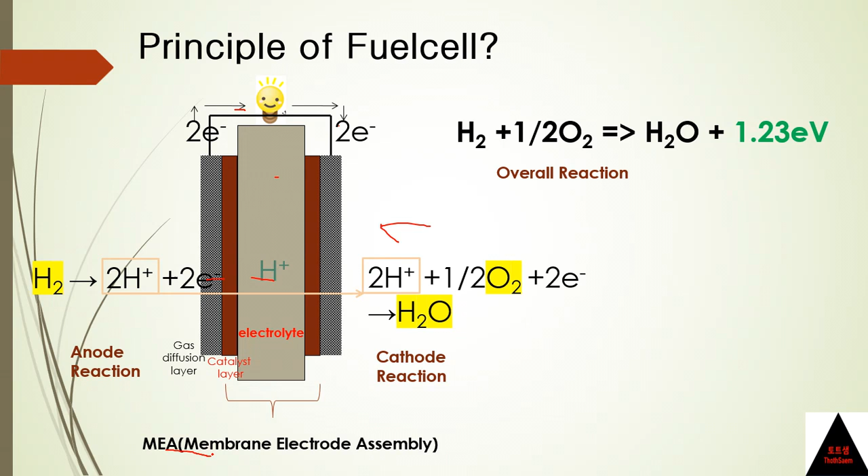Outside this, a carbon paper or carbon cloth called GDL supports the electrode. Here is GDL. And it spreads fuel in horizontal directions. And the gasket and bipolar plate are located outside it to support MEA and supply fuel and air. We call the bipolar plate a separator of the unit cell. It allows water to be discharged well outside the fuel cell.

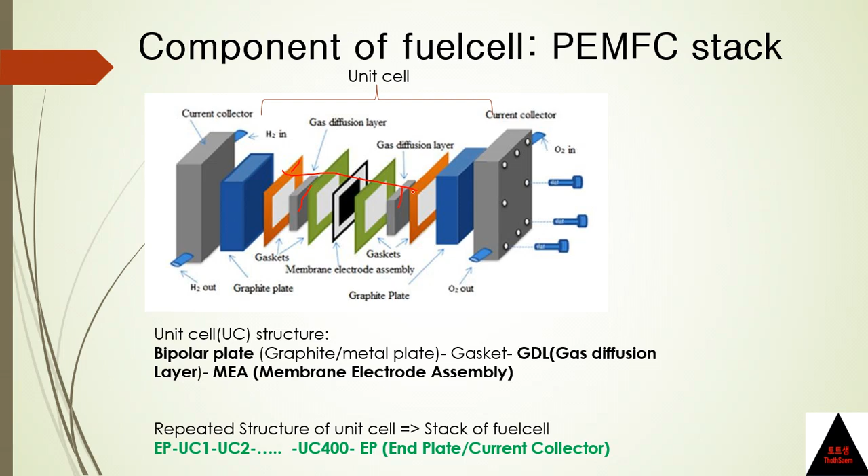In addition, these unit cells are stacked from tens to hundreds to form a fuel cell stack, which accounts for about half of the cost of the system. These fuel cells can be classified into five major types depending on the types of electrolyte. And I will talk about the characteristics of PAFC, PEMFC, MCFC, and SOFC.

Let's begin. The electrolyte for PAFC uses liquid H3PO4, and the PEMFC electrolyte is solid polymer membranes such as Nafion, and AFC uses KOH, and MCFC uses lithium carbonate or potassium carbonate, and solid oxide fuel cell uses YSZ. The charge carriers are hydrogen ions, protons, and OH minus and CO3 minus, and oxygen ions and/or hydrogen ions.

PEMFC and AFC are low temperature fuel cells, with an operating temperature of less than about 200 degrees Celsius. MCFC and SOFC are high temperature fuel cells, with over 600 degrees operating temperature, and only MCFC and SOFC enable internal reforming, and the system complexity of MCFC is the highest.

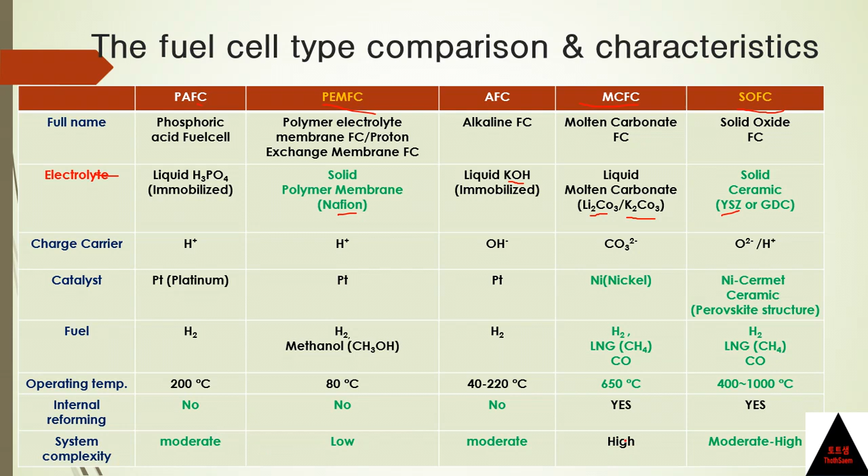PAFC, phosphoric acid fuel cell, is the first generation fuel cell for power generation, and a representative company is Doosan Fuel Cell. It has a similar structure to PEMFC, but uses liquid electrolyte, as I mentioned, and uses platinum catalyst because it is a low temperature fuel cell with an operating temperature of about 200 degrees Celsius. Therefore, about 10% of system cost is occupied by the platinum catalyst, and pure hydrogen is supplied as fuel, but it is more stable with a little more impurities than PEMFC.

The main product is a 440 kilowatt class PAFC with a power generation efficiency of 43%. And it can be extendable to megawatt class. And its lifetime is 40,000 to 60,000 hours long. But it has expensive platinum catalyst and also has CO and sulfur poisoning issues. And there needs to be a continuous supply of liquid electrolyte during the operation.

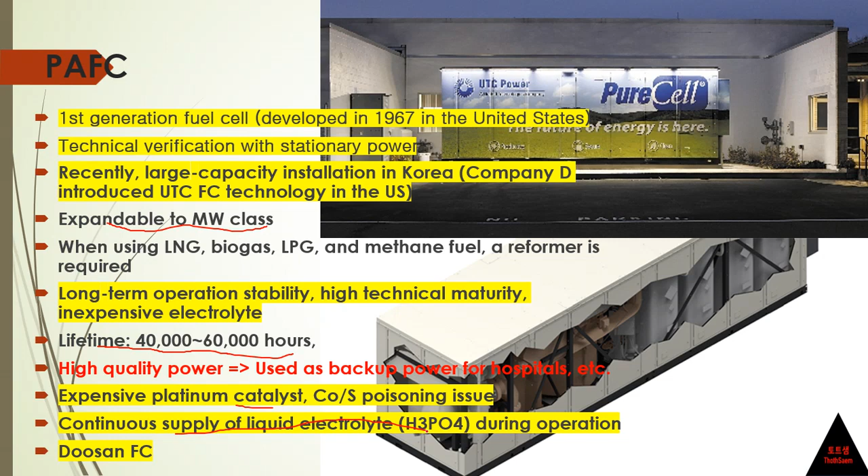There is MCFC, second generation. Representative companies are FuelCell Energy of the United States and POSCO of Korea, which introduced FuelCell Energy technology. Until 2 years ago, it was the most actively installed fuel cell for power generation in Korea. It has the following characteristics.

It's suitable for stationary power, and you can use various fuels such as coal gas, natural gas, methanol, and biomass. And using internal reforming, its efficiency is rather high, and it has no CO issue. It can use CO as a fuel, but there is a stack lifetime issue. It uses highly corrosive molten carbonate, so there is a need to develop corrosion resistant materials.

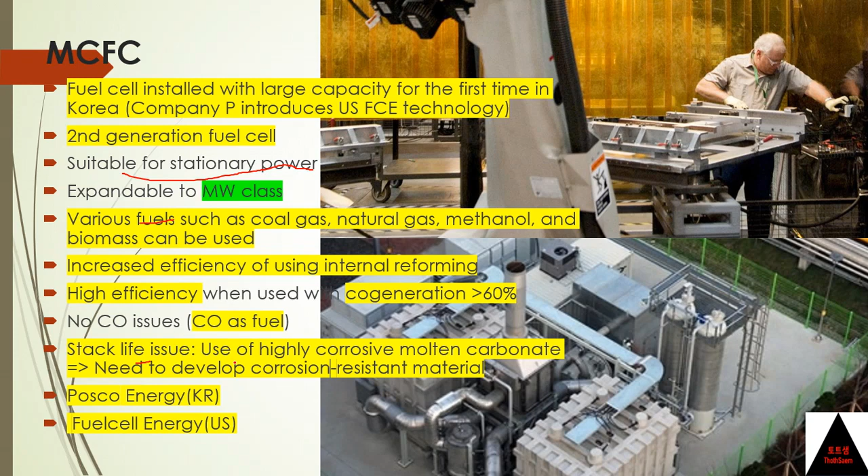SOFC, solid oxide fuel cell, corresponds to a third generation fuel cell. The operating temperature is very high, from 600 to 1,000 degrees Celsius. And electric efficiency is over 60%. So it's being developed for power generation as well as for ships and automobiles. And Bloom Energy is the representative company. And Doosan Fuel Cell is also developing technology in cooperation with Ceres Power in this field.

Due to its high power generation efficiency and simple structure, it is advantageous for cost reduction and system miniaturization. And development and commercialization are underway as a next generation household fuel cell. The main technical features are as follows.

It uses YSZ as electrolyte, and nickel-YSZ cermet as anode, and the cathode material is perovskite structured ceramics such as LSM or LSCF. Interconnect materials are doped lanthanum chromite. And nowadays there is a need to develop intermediate-temperature SOFC, with an operating temperature of about 400 to 700 degrees. It can enable cost reduction by replacing the ceramic materials.

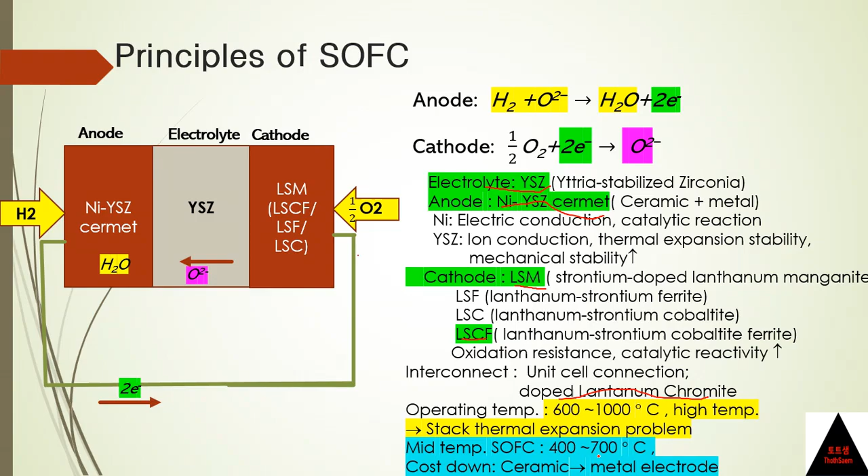The representative companies for each fuel cell are as follows. For power generation, PAFC is Doosan, MCFC is POSCO, PEMFC is Toyota and Hyundai, SOFC is Bloom Energy. For automobiles, there are two companies; they have a lot in common, and the performance is similar. And with the support of the Korean government, which invests heavily in fuel cells for transportation, Hyundai is slightly ahead in its sales with 12,000 units.

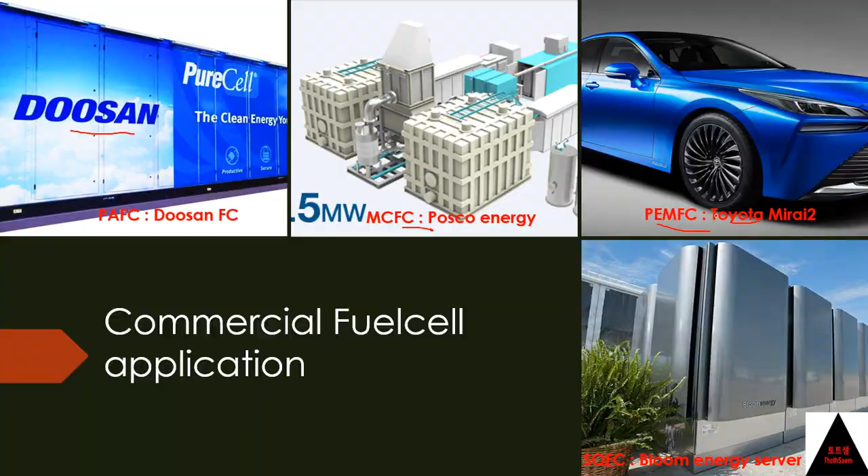Now, let's take a look at the driving principles of hydrogen vehicles, FCEV. Hydrogen fuel is stored in a hydrogen tank at high pressure over 700 bar. And the stored capacity of this hydrogen storage tank determines the mileage. About 5 to 6 kilograms of hydrogen can be stored, and a driving distance of about 600 to 700 kilometers is currently possible.

High pressure hydrogen is supplied to the fuel cell stack by lowering the pressure through a regulator, and oxygen is supplied from air through a compressor or blower. The fuel cell system consists of mainly 4 parts: fuel cell stack, FPS, fuel processing system, APS, air processing system, and thermal management system. Here is the thermal management system. Motor and inverter. Lithium polymer batteries are also needed, as in an EV. An additional hydrogen tank is also needed, which is an expensive type 4 tank.

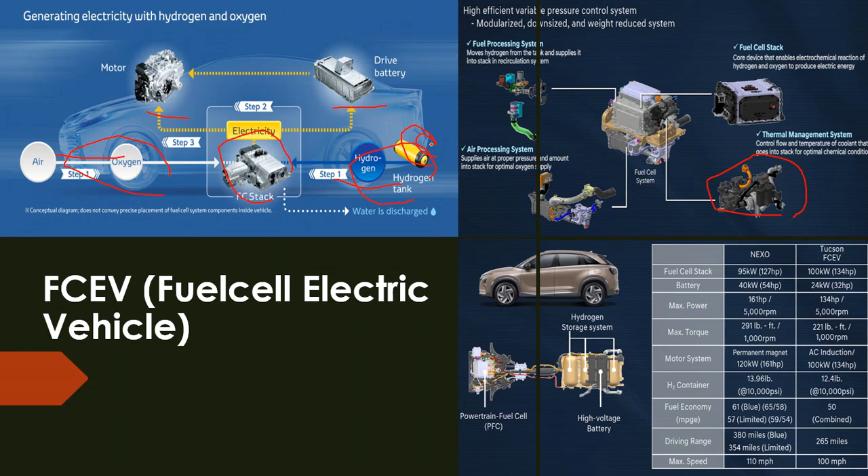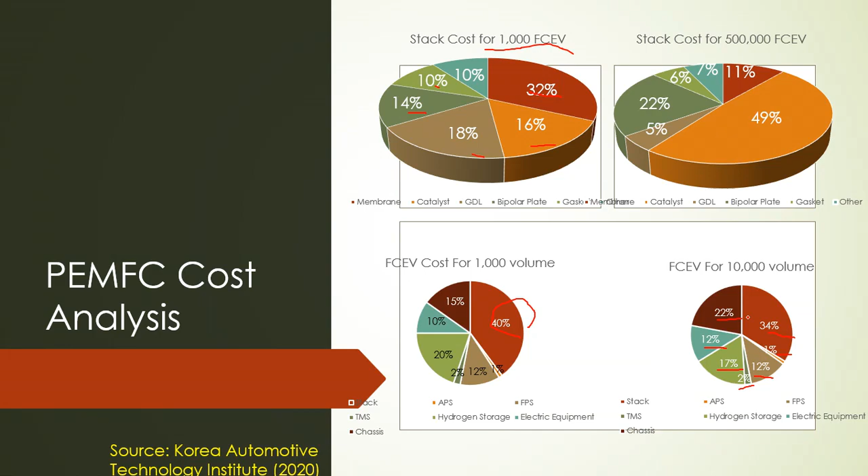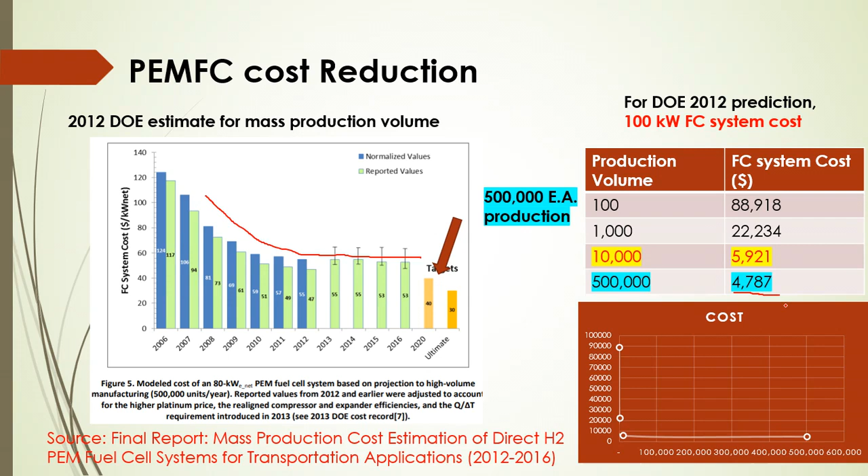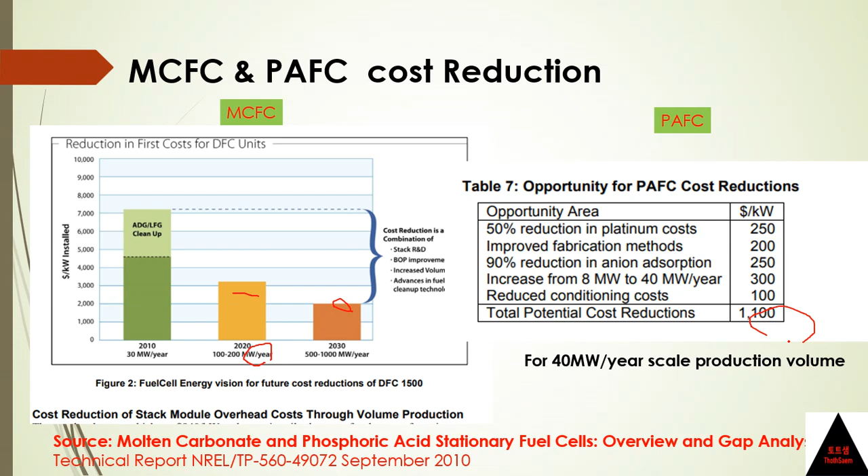The MCFC cost is expected to decrease about 33%, from $3,000 per kilowatt when producing 100 megawatt volume per year, to $2,000 US when producing over 500 megawatt volume. In the case of PAFC, a cost reduction to $1,100 US per kilowatt seems possible with a 40 megawatt production volume, but the platinum price accounts for about 10 to 20% of the total cost.

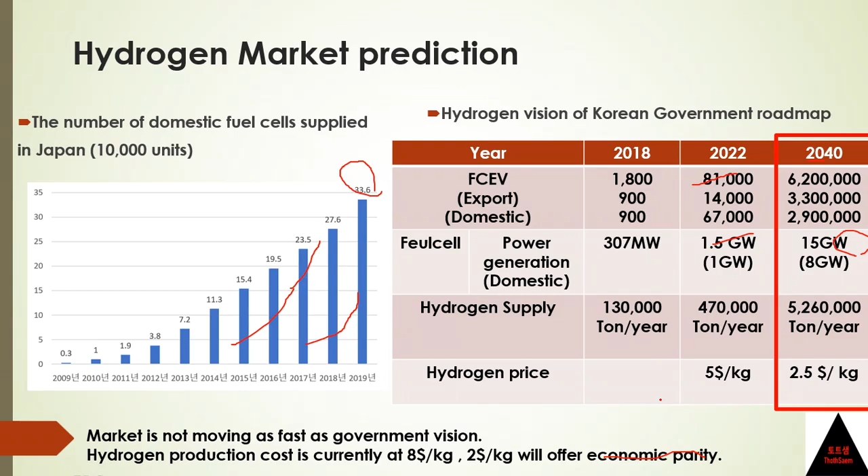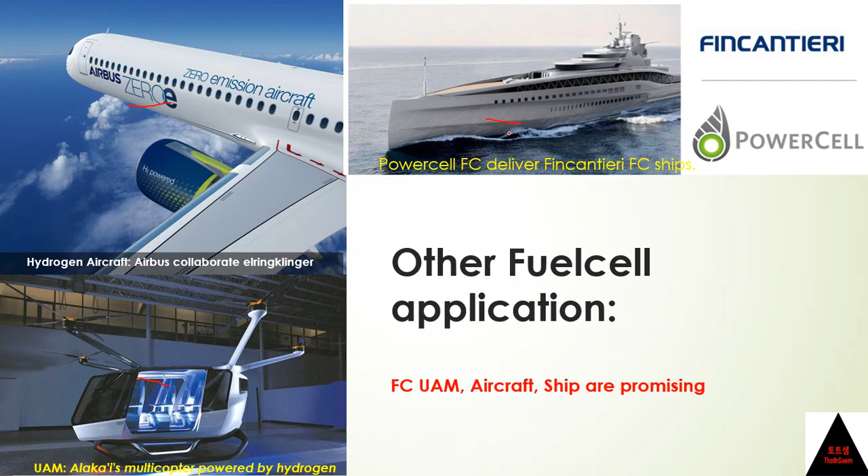So fuel cells with high energy storage densities are attracting attention in areas such as aviation, UAM, and ships, as well as fuel cells for automobiles and power generation. Fuel cells have an advantage over lithium batteries because they can have a system weight density of up to 10,000 watt-hours per kilogram in the aviation field, and this field has the potential to grow faster than automobiles. In addition, since marine fuel cells have fewer volume restrictions, existing fuel cell technology for power generation can be applied. It is possible to design low noise, high power, eco-friendly ships. Therefore, initial investment in this field can be viewed as promising.

Finally, this is a SWOT analysis of the hydrogen economy. Hydrogen energy is next generation energy that can achieve democratization of energy with the advantage of being abundant. But it is currently limited in that there are no economical technologies to produce green hydrogen, and it's difficult to produce innovative startups due to high capital barriers. However, there is an opportunity factor in that it is supported by governments of each country as an eco-friendly power generation technology and is compatible with alternative resources such as ammonia. As a threat factor, there are risks such as delays in industrial growth due to economic blockade or changes in subsidy policies. So it's important to accurately grasp each company's technology, capability, business model, and vision.